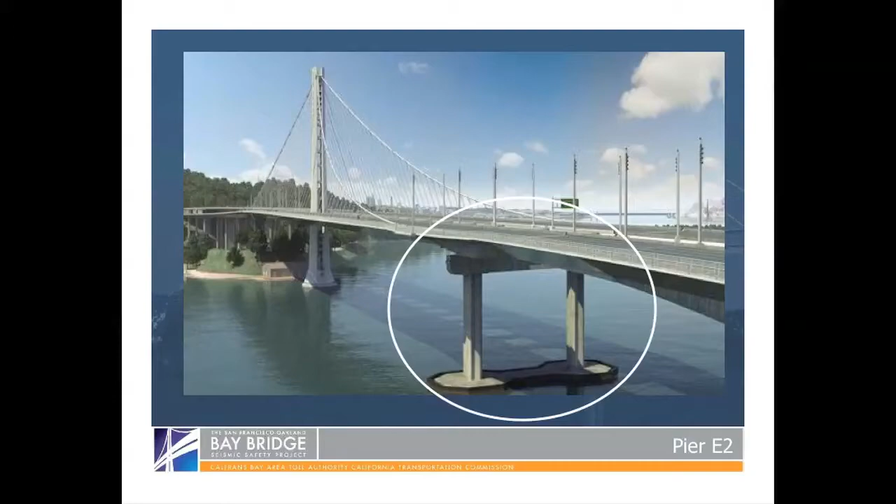All right. Thank you, Andy. Chair, Commissioners, good morning. Thank you for the opportunity to provide you with an update on the situation that we're currently working with at the E2 location. The first slide is just a reference point to show you the location that we have been talking about. This is what we refer to as Pier E2, the easternmost pier of the main span of the bridge. Next slide. This is a little bit more detail about the location. On the top, you're basically looking down on the top of the pier without the bridge deck and cross beams in place. And the bottom piece is an elevation showing you the deck and the pier itself. Just a point of reference, you see the B1, S1, B3, etc. up on the top. The B's are bearings, the S are the shear keys.

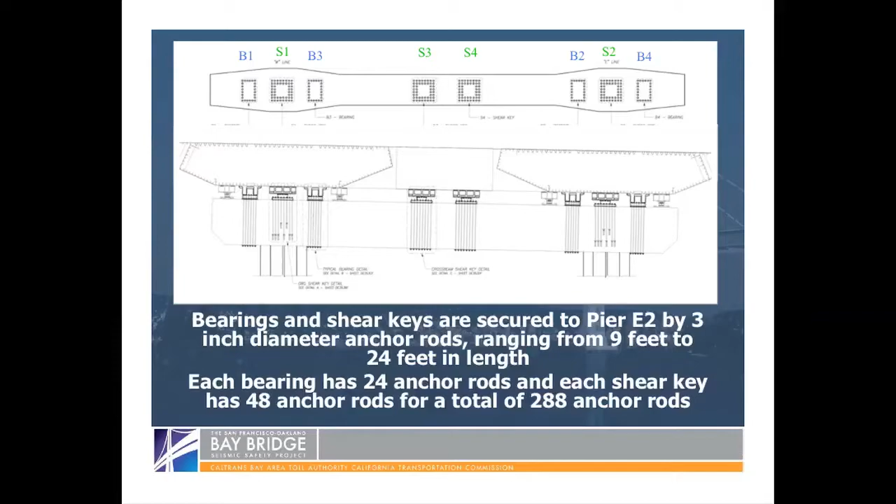And one other point to note down on the bottom, you notice the long lines that extend down into what we call the cap beam. One of the main issues we're dealing with is that those rods go through for all of the bearings and 2 of the shear keys, but there are 2 locations where those rods do not go all the way through the cap beam. They're actually sitting right on top of the column of the pier, which makes access at that location very, very difficult. There are 24 anchor rods installed for each of the bearings and 48 anchor rods for each of the shear keys, for a total of 288 anchor rods at this location. Next.

There are two distinct batches, if you will, of anchor rods. Some were installed and fabricated in 2008, and it has to do with that access issue. They had to be installed prior to the pouring of the concrete at this location, whereas the rest of the anchor rods could be installed after the pour. So we had one batch that was fabricated and installed in 2008, and another batch that was fabricated and installed between 2010 and 2011. The yellow circles on here show the locations where the 2008 rods were installed.

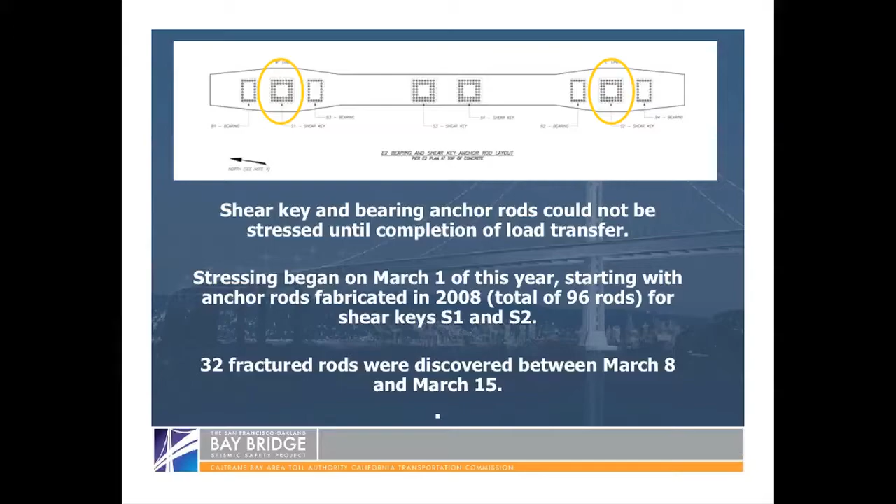Now, we couldn't actually start putting tension on those rods until after load transfer because we had to get the final geometry of the bridge in place before you could actually secure these down. So once load transfer was complete, and that was right at the end of last year, very early part of this year, we started tensioning these rods. Stressing began on March 1st, and it did start with the older batch of the anchor rods, the 2008 batch, which are at shear keys 1 and 2, the areas circled in yellow on this diagram.

Within a very short period of time after tensioning, we started discovering fractured rods. We discovered ultimately a grand total of 32 fractured rods. Subsequent to the fracture, Director Dougherty issued me a 10-point action plan to review and assess the situation, and that plan is currently being used by the Oversight Committee to review progress on this issue. And one of the first things it outlined basically was a forensic analysis to be done to determine what happened here. And one of the first things that we do is we start going back and look at the documentation with respect to the fabrication of the rods in question.

The documentation includes a pretty extensive set of documents relating to both quality control and quality assurance. Some of the key points are outlined on this slide. We review the quality control that's performed by the contractor and the supplier, which includes the mill certifications that show the chemical composition of the steel in question, various independent laboratory tests of material properties that are performed over the life of the fabrication of these items, and ultimately certificates of compliance that are provided by the supplier and the contractor for these particular items.

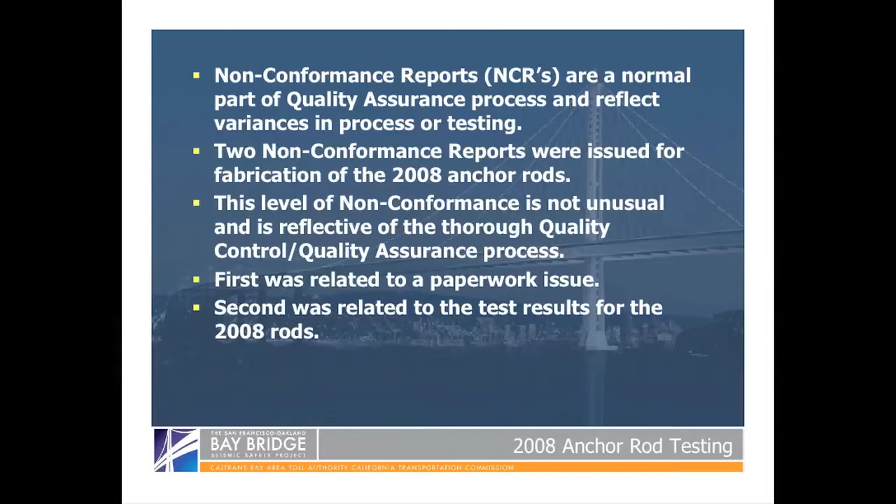Now, in reviewing the documentation on the 2008 rods, we did observe two nonconformance reports. It's important to understand that these are a normal part of the quality assurance process, and they do simply reflect variances in process or testing. The two nonconformance reports that we observed in the record for these related to two particular issues. The first issue related to what's referenced on one bullet is paperwork. I don't mean to simplify that too much. Basically, there is extensive documentation associated with the fabrication of any items like this, and that paperwork is very important for a variety of reasons.

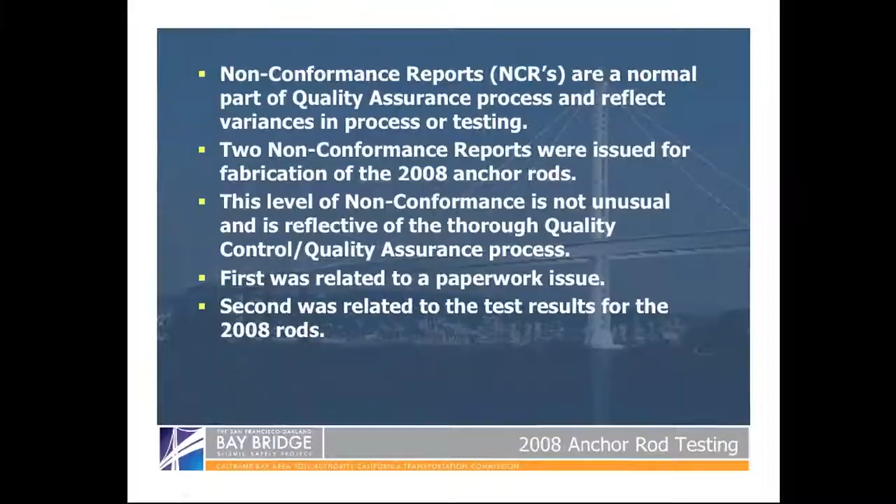It's important right now because it sort of helps us go back and take a look to see what may have happened in this situation. And if the documentation isn't present, that can be an issue. So we had one situation where actually the materials wound up being sent out for delivery ahead of the documentation. That was the subject of one of the nonconformance reports. The documentation did catch up, so we do have the documentation in place. The second nonconformance report related to our final laboratory testing that we performed in-house.

Next slide. In a little bit more detail on that laboratory testing, out of over 150 individual results that were obtained from both quality control and quality assurance testing, we did only see 5 results that were below specifications, and 4 of those 5 results related to one of these nonconformance reports, and all 5 involved one particular mechanical property that we refer to as elongation.

Elongation is one of two measures of what we refer to as ductility. Basically, it's how much does the steel give. That's one of the two valuable properties of steel. Steel is very strong. It also gives a little bit. A lot of people don't realize that, but it does, and that's one of the benefits in using steel.

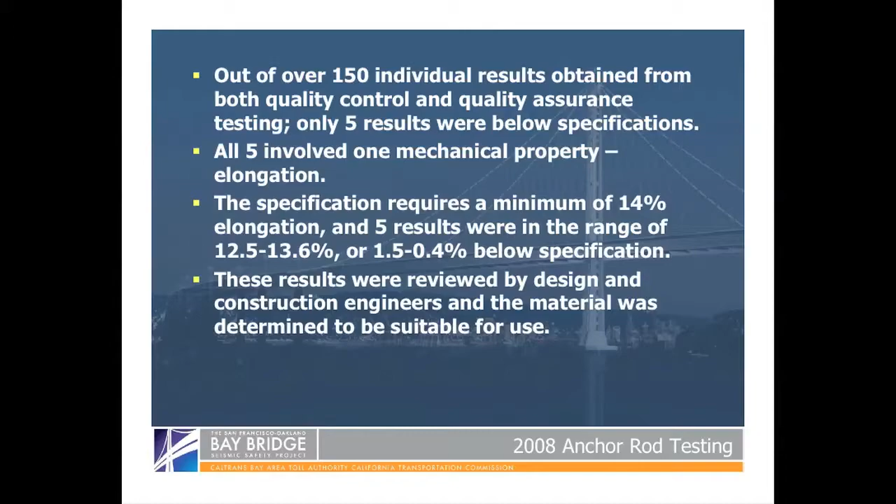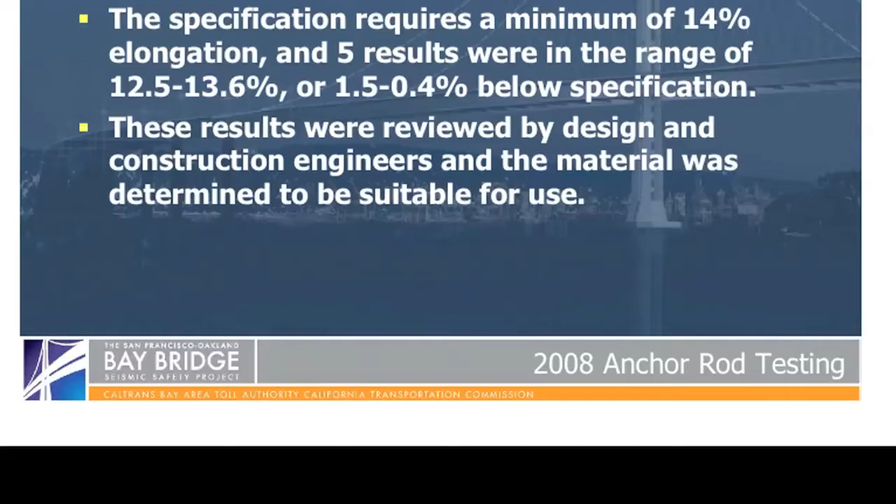The specification for these particular rods required a minimum of 14% elongation, and 5 results were in the range of 12.5 to 13.6%, or 1.5 to 0.4% below the specification. Just to give you some context here, you're talking about a fraction of a millimeter difference.

These results were reviewed by the design engineers and construction engineers for the project at the request of the contractor to determine if the material was suitable for use, and a determination was made that the material was suitable for use, with all of the test results taken as a whole.

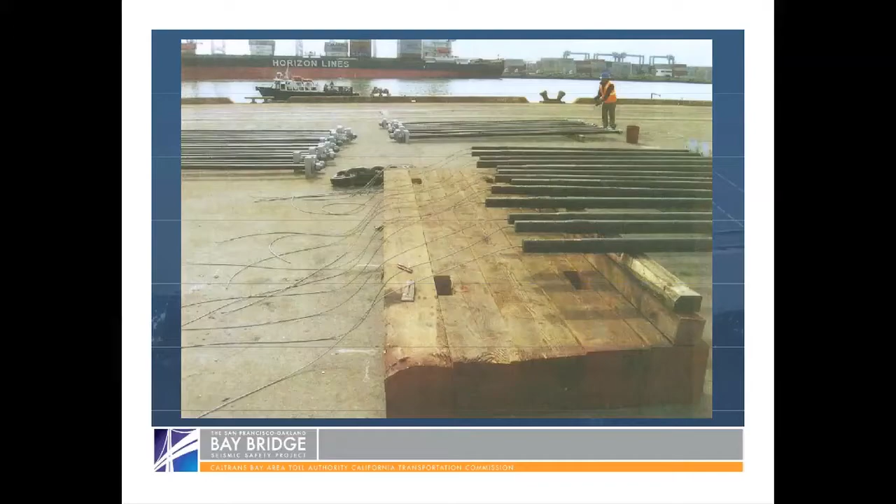Next slide. I've just got a couple of images here. I think you've seen some of these in the past, but again, you have an image of the rods at delivery. I've got one piece of one of the fractured rods sitting in front of me here just to give you some sense of the size of these. These things are really big, and again, they range from about 9.5 to 24 feet in length, 3 inches in diameter. These are massive steel components of the bridge.

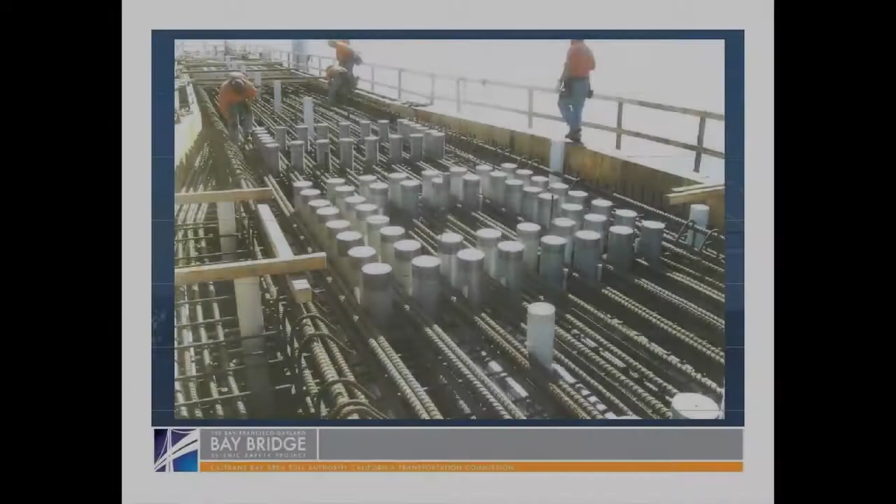Next slide. This shows you one of the shear key assemblies actually in place. This gives you some sense of why the assembly had to be put in place ahead of time. Prior to the concrete pour, you see all the reinforcing steel around the assembly area here, and it's getting ready now for a concrete pour. The concrete would have gone in very shortly after this. Next slide. This shows you kind of the ultimate configuration at this location with a bearing on the left, the shear key on the right.

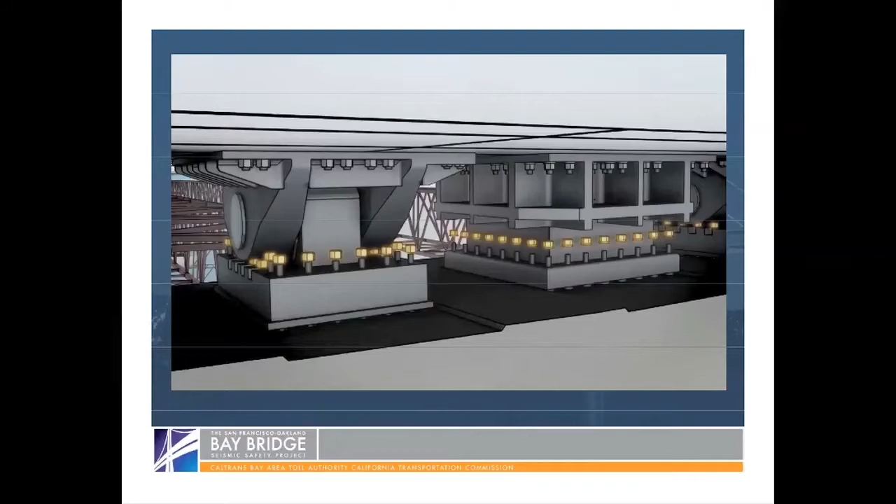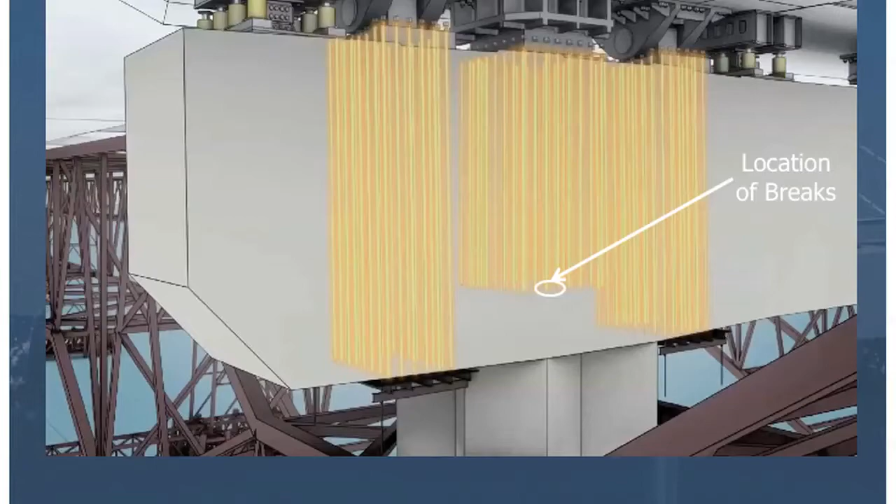Again, we've extracted 4 rods at this point from Shear Key S1 and S2. We will be extracting more in the future, but with respect to the 4 that we've extracted, all of the fracture locations are the same. They are all down at the bottom of the rods. They are all occurring right at the first thread immediately above the nut that's located on the bottom portion of the rod.

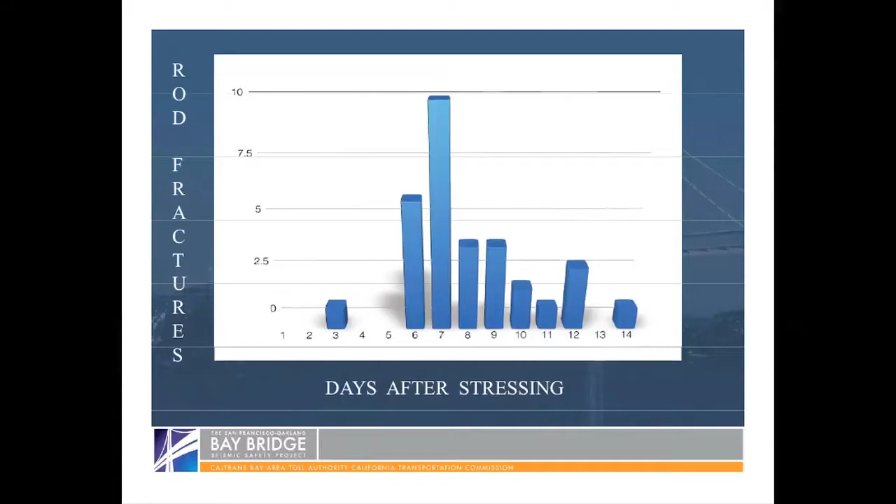Next slide. Another piece of information that is of significance. This basically is a histogram showing you when the fractures began to occur. It's reflective of how many days after stressing were we at and how many fractures did we see. And as you can see on this histogram, the fractures started occurring fairly quickly after these rods were stressed, with the majority of what we observed happening within a fairly condensed period between days 6 and 12.

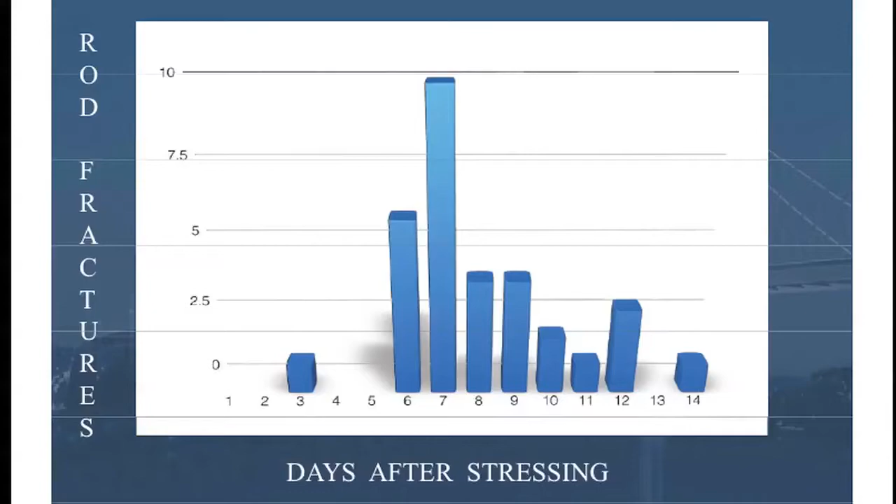It's important to understand in reviewing this, however, that after day 14 we did detension. We reduced the pressure on these rods significantly. So there was a significant change that occurred at day 14.

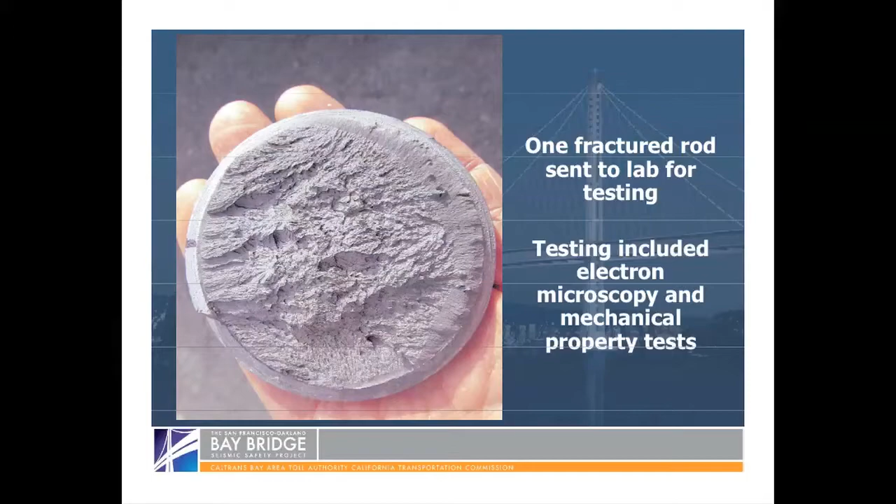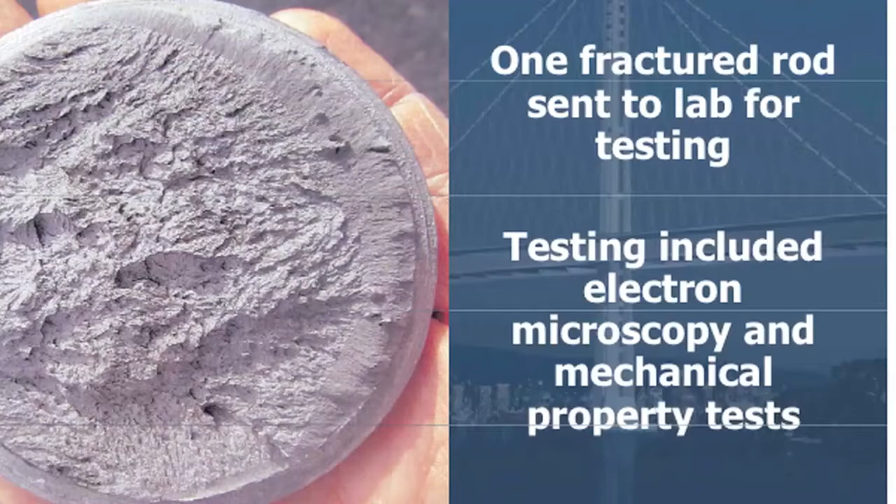And one thing of note in this image, it's probably a little bit hard to see displayed up on the screens, but if you look to the right of the actual image, you see a little sort of darker and flatter crescent moon shape that starts right up at the top of the rod fracture area and goes all the way down to the bottom and goes in for about maybe an eighth of the distance inside of the fracture area. That's an important indicator. That tells us that's the area where the fracture began. It also provides us with some additional information that I'll touch on when we go to the next slide.

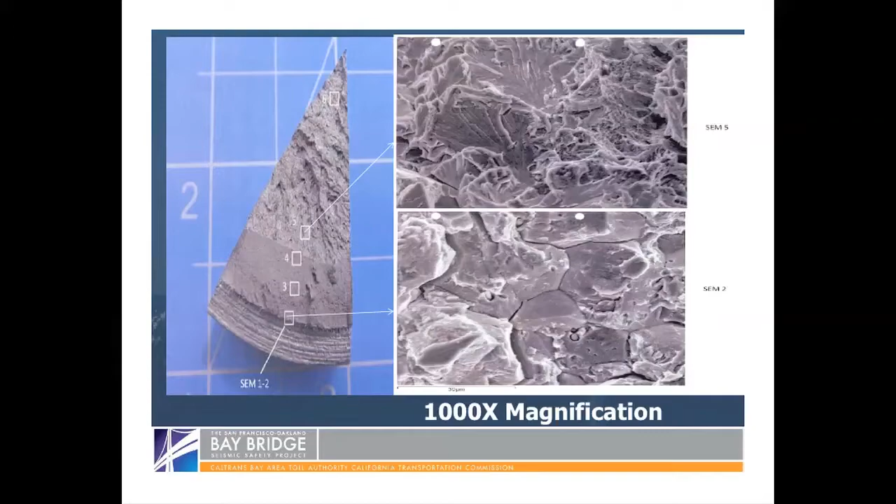That sample was then cut into a little wedge and put under a scanning electron microscope. And you can see the actual wedge here, and then 2 images that were taken from the electron microscopy. These are both at 1,000 times magnification. The image on the top is a view of the interior portion of the rod, and the view on the bottom is taken from the exterior portion in the area where the fracture began, that little crescent moon area that I referenced in the prior photo.

And you notice on that bottom picture, you see basically some geometric shapes with little spaces between them. Those are the spaces between the actual grains of the material of the steel. And you see that there is a bit of a separation between those grains, whereas you look at the top piece and you do not see that. That is fairly strong evidence at this point that there was hydrogen present in the rods and that that hydrogen initiated the fracture. We do not know at this point what the source of the hydrogen was.

Hydrogen can be introduced through production potentially. It can be introduced environmentally, potentially after production. And that is a key question that we will continue to look at, but it's very important to understand we do not have the answer to that question. We're going to continue our examination on that issue.

The other work that's ongoing at this point in time is development of a design solution, and with that, I'm going to hand it off to Stephen Maller from the California Transportation Commission, another member of the project management team, to talk about the various alternatives that are currently under consideration for a fix of the problems that we have at Shear Keys S1 and 2. Stephen? Thank you, Tony. Good morning, Commissioners.

And as Tony mentioned previously, the rods that have fractured are in a location that is not very easily accessible to us. So we need to devise a retrofit strategy for the two shear keys where the broken rods are. What you see on the screen is a representation of one of the alternatives that our design engineers are looking at, which is basically a steel option of how to put a collar around the shear key base and connect it back up to the pier.

We have other options. We've got about 3 or 4 options that we're working on. Another one is a concrete option. Another one is extracting the rods that have broken and trying to install some kind of a new device into the holes. But all of these things are still very much in the conceptual stages. The engineers are working on this. These will then be presented to our peer review committees who will weigh in on it.

Then it will be brought up to the PMT members who will vet this stuff, and then the PMT will make a recommendation to the POC, and the POC will make the ultimate decision as to which retrofit strategy we're going to be using. All of this is going to take some time. We probably will not be back to you with the ultimate solution for probably another few weeks to a few months. And with that, I'll turn over to Andy, who will go over the other 190-odd rods that are in a slightly different location and slightly different situation.

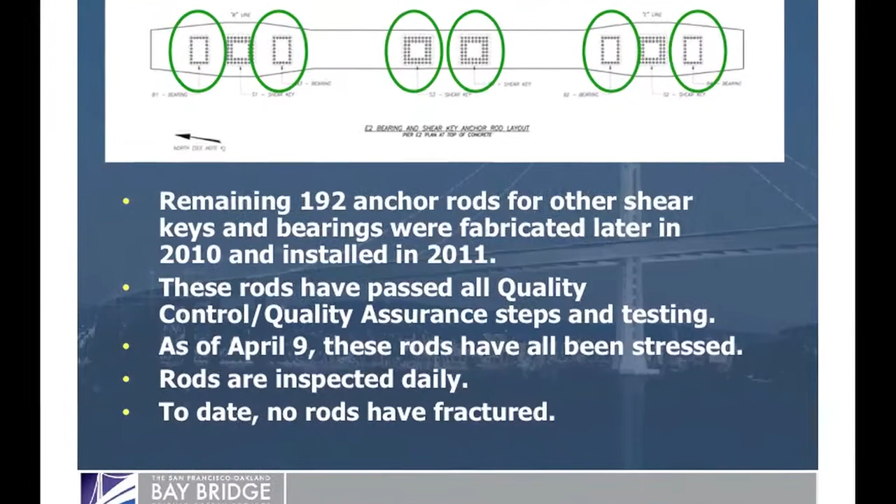Thank you, Stephen. Going back to the slide that Tony started with, this is the same pier view, so we're looking down on top. The 6 green circles represent the remaining 2 shear keys, the 4 bearings that are under each of the box sections on the left and the right of the page, and then 2 more seismic elements in the middle that are similar to the ones that Tony described with the embedded rods. It's important to remember that overall there's 288 rods in this cap that hold the bridge in place and deal with the seismic work. 192 of them, while they are similar, are also very different.

They were fabricated in 2010. They were installed in 2011. They're what we call through bolts. They go through the entire cap, and so they don't have the problems associated with sitting in water potentially that the embedded ones do, and they can also be replaced in effect if they have damage at some point in time. In addition, when you go back and look at the quality control and quality assurance records, they don't have any of the nonconformance reports that Tony was talking about, and they passed all of their various tests.

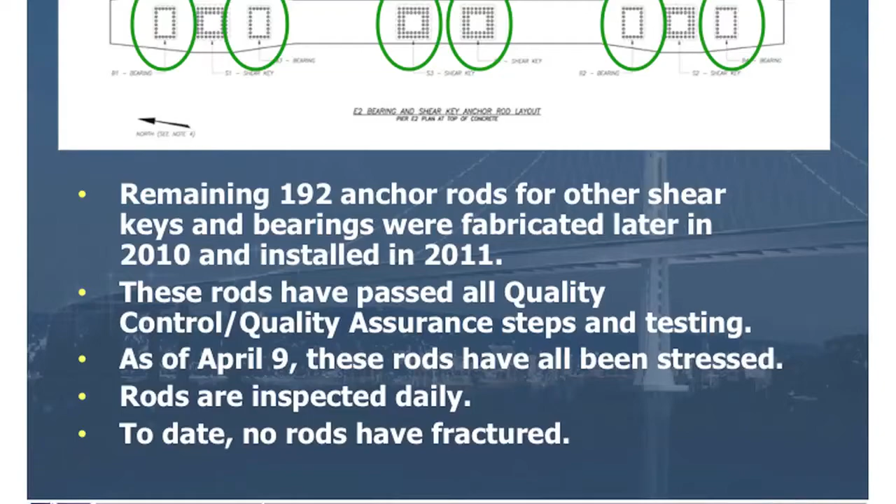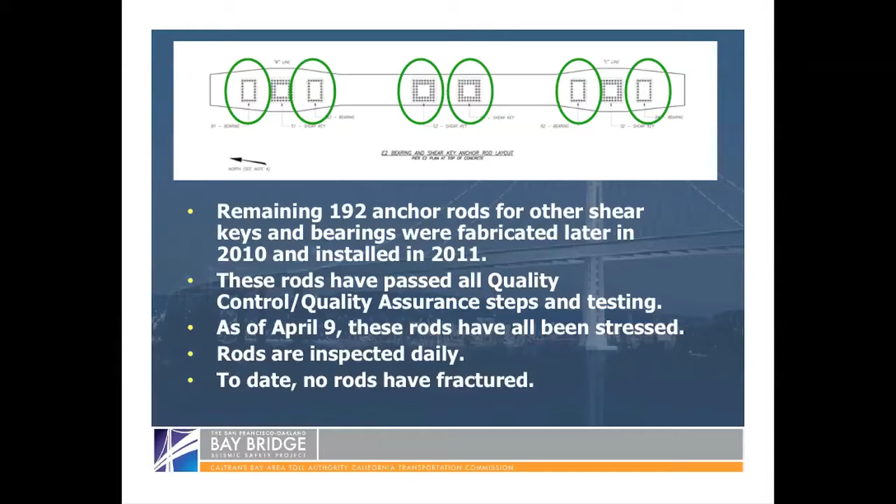In addition, as of the beginning of April, the contractor has stressed them all to the same loads that are referred to in the embedded rods, 70% of their ultimate capacity, and they have been stressed and are in place. They are being inspected daily to identify whether there's any signs of failure, and to date there has been no failure. So it's in effect an in situ test that is helping us evaluate whether or not they have a similar problem.

The Toll Bridge Program Oversight Committee has approved a sampling and test method for these bolts to give us a level of assurance that they're fit for their purpose. And so in addition to having them all stressed and visually inspecting them, we have instrumented 10 of them that mechanically, electronically take a look at what's going on inside the rod, and those electronic measurements can tell us whether or not a crack is growing. So that information will be evaluated over a period of time.

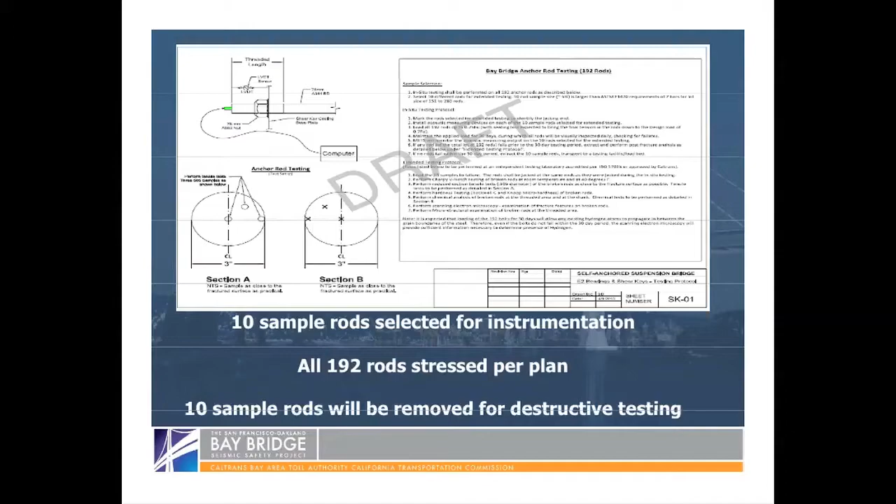And then 10 rods will be removed, about 5% will be removed, and they will be subjected to complete destructive testing, and obviously we'll have to then get replacement bolts for them. But the thought is that by going through these several steps, we'll have a very good indication as to whether or not these bolts have a similar deficiency that was identified in the embedded rods.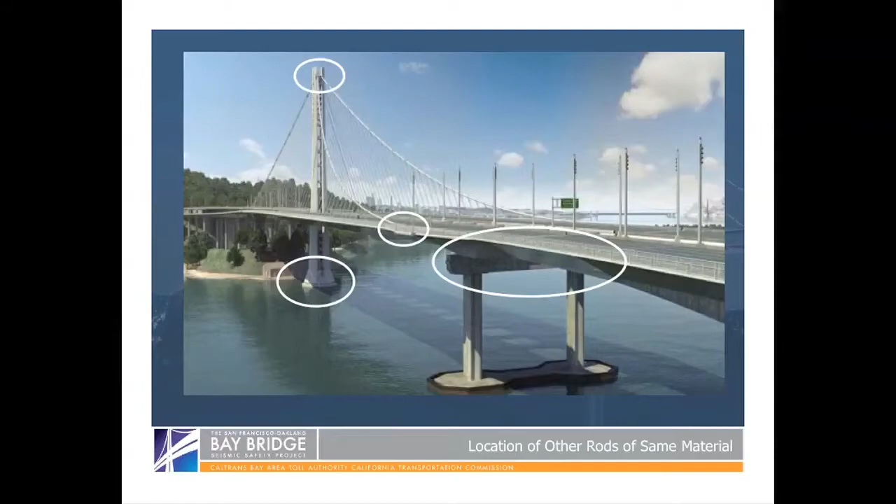Part of the ongoing work, though, will be to go back and review all of the various quality control and quality assurance results on those bolts and continue to determine whether or not there's any identified problem with those. And that work will continue on for a period of time, and we'll be reporting back as to those findings as we get to them.

In closing, I wanted to point out one thing. We put the memo from Director Dougherty on your desk, and so you've got the points that he has directed Tony and his staff to produce results for. I also want to point out, as Stephen mentioned, not only will the Oversight Committee review the design approval, it will go through our seismic peer review panel, and they will also bless it before it goes to the Oversight Commission.

We will be back with more information as the investigation of why the failure happened on the 2008 rods continues. It's not been determined exactly what the problem is yet. We will also be coming back as the retrofit of the shear key is completed, and then also continue to report on the results of the 2010 testing. It's important to mention that we'll be using this forum, either the BATA full commission or the Oversight Committee meetings, to present those updates, and we look forward to answering whatever questions you all have at this time.

Okay, thank you, Andy and Tony and Stephen. Appreciate that report. Any questions or comments from the commission? Commissioner Hagerty?

Thank you, Mr. Chairman. Certainly no structural engineer, so the thing that keeps going through my mind, and I hear this whole discussion about the hydrogen, and I guess at times I've bought into that, but something in today's presentation kind of made me think twice about this. You said that all the bolts have broken in basically the same spot. You said that there was certain thread numbers that it had gone up. And it just kind of got me thinking about this whole hydrogen thing.

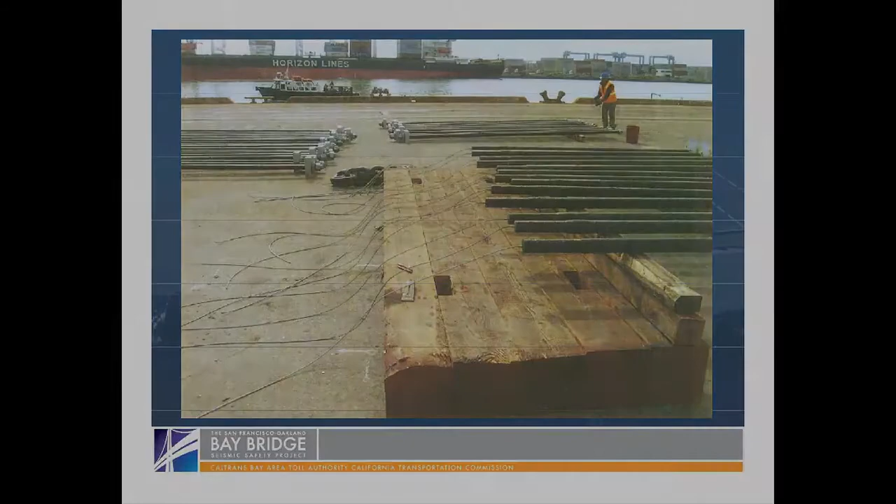The pre-embedded ones, Peter, could you go back to the image that shows the delivery of the rods? Right here, you see, these are the rods that would be embedded, and you see a wire coming out from each of them. Those wires are attached to a very small threaded fastener that threads into the top of one of these. You can actually see it on this one here. And so they're in place. You pour your concrete. Once the shear key is delivered and put on top of that, you thread the wire through the hole that accepts this in the shear key, and the wire is used to pull it up into place, and then you put your washer and your nut on top of that, and you secure it. Okay.

Can you talk a little bit more about how, again, we've seen a drawing of a potential solution to reinforcing these embedded rods. Could you explain in a little more detail how that fits with this particular photograph or one of the other drawings? What you see in the middle of that rendition is the actual base of the shear key itself. And the bolts around it that Peter's pointing to, those are the ones that have been breaking on us. So what we're doing here is putting steel members onto the plate itself and around the plate, and then putting new rods through all the way down to the bottom and clamping these things in place. That's the steel alternative that the engineers are looking at.

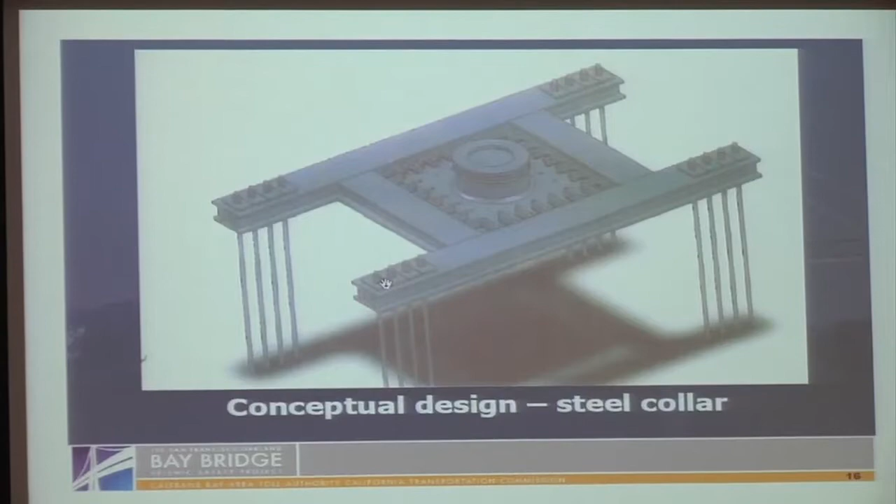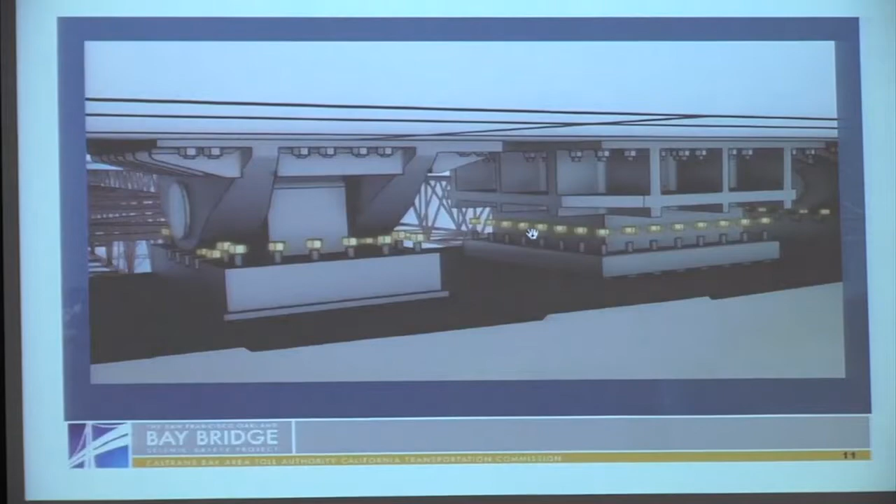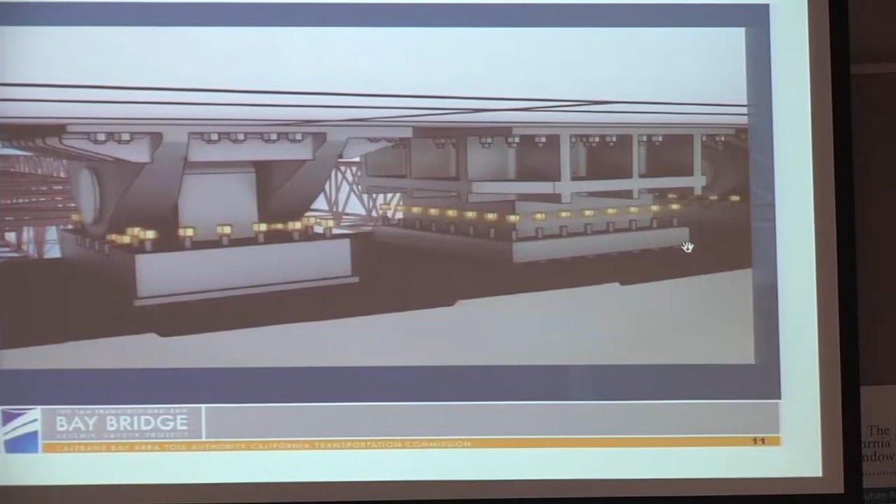So could you just show me a little more closely where that would fit in relation to one of these drawings that shows the whole thing? Around each key. Where you see the nuts kind of elevated, those are the ones that are failing on us. So we would put the steel elements in those areas and then extend them out to the sides, and then put something on the underside and bolt them together.

Okay. I recognize that you are looking at a lot of different causes and solutions, and you raised a couple of issues about the elongation, the flexibility, the metal, and the ones that seem to be experiencing the most tension are breaking at this point. And you mentioned that these are tensioned at a much higher percentage than is traditionally done in this kind of construction or in other parts of the bridge. So are you looking at potentially other types of materials that could be used for those rods, if this rod design is what we continue with, so that we could be confident that even over time and weather conditions, they would sustain both flexibility and durability?

Well, in the steel solution, we're pretty much looking at maybe not the same manufacturer, but the same type of rod situation. On the concrete solutions and others, it would be totally different tie-down systems. Commissioner, if I could add a little bit, there's several different ways to do high-strength tensioning. You can use the bolts as we've got here, which are hardened steel that is galvanized. There are also high-strength rods that are designed more for this purpose, and they're used in standard bridge construction all over the place.

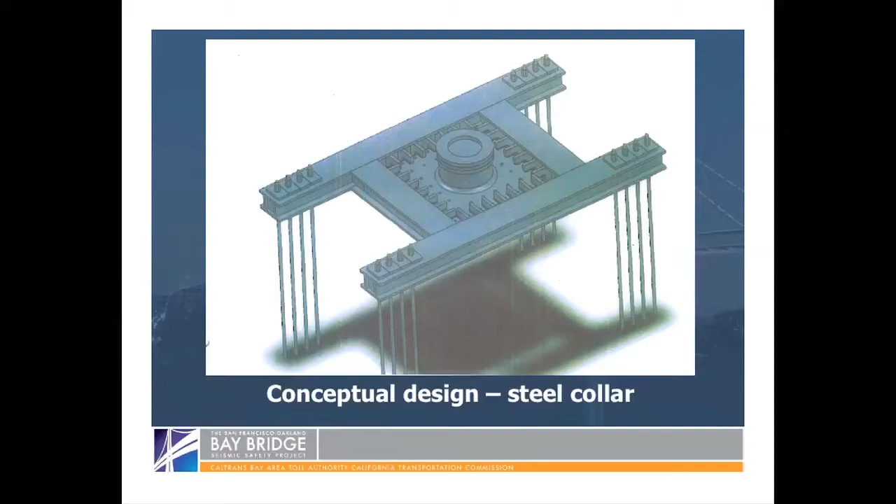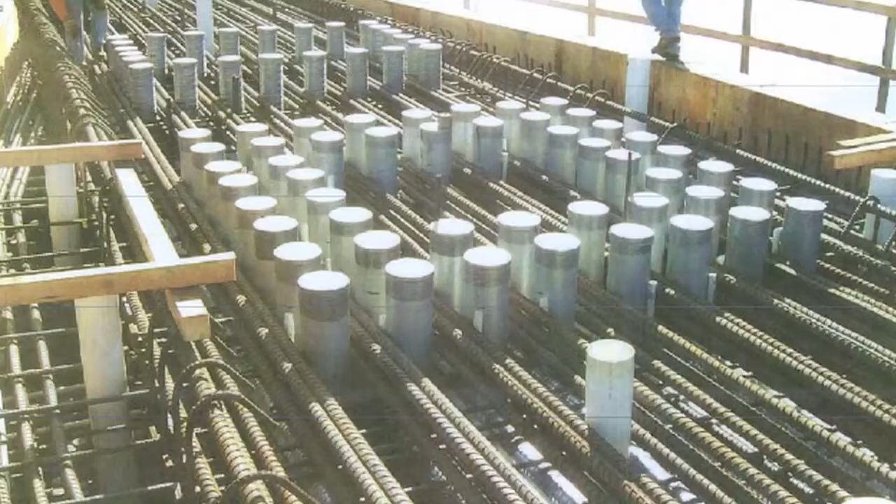You know, we put a ton of rebar in concrete these days, and it makes it strong, and it gives us a lot of redundancy, but it also doesn't give you a lot of room to maneuver if you've got to come back in and put some holes through that and put some new rods in. So I think it is the closeness of the quarters that is really giving us a design challenge. And as we've indicated to you, the reason that we are taking this so seriously is that tying down these seismic stabilizing features is a very important function of these rods. Even though they cost a couple thousand dollars a copy, they've got to work as designed because what they're holding down is very important.

Well, I know it's not the first time we've dealt with congestion management here, so I understand that. As a matter of fact, we had this precise problem on the Benicia Bridge, where we had a lot of rebar congestion and the same kinds of issues when we were trying to put the column onto the pier cap, and sometimes the rebar's not quite where you thought the design said it would be, and you run into an actual physical conflict. And so that is, I think, one of the main challenges the designers are confronting: how do you retrofit a solution here given the constraints of the site.

In light of that, Steve, how do we know that the scheduled opening of the east span is not going to be impacted? We don't. Based on what we know today, we think we're going to be okay. But we don't know what our schedule is until we have a solution, and I know this is dangerous to say in a room full of reporters, but you can't believe everything you read in the newspapers. There was something in the papers this morning that said that the solution is $1 million. Well, we don't know what the solution is, so we don't know what it costs either. So until we have the scope of what we are doing, we don't know schedule, we don't know budget.